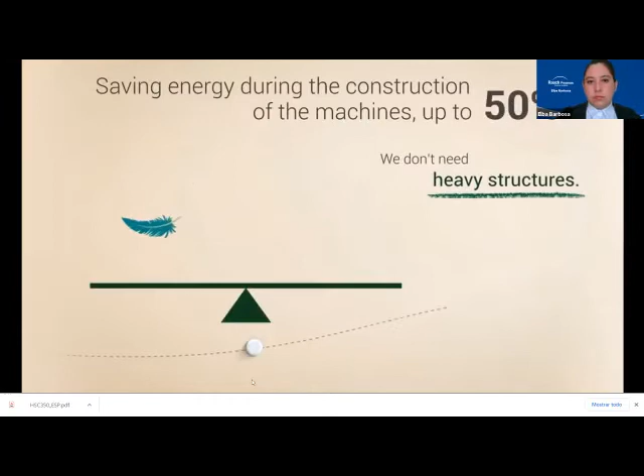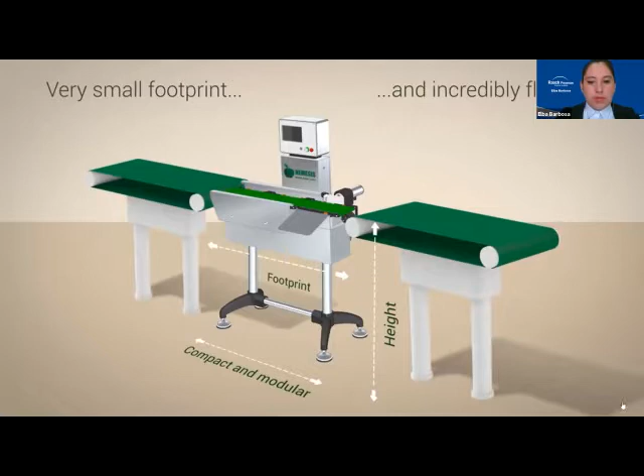Elba, creo que no escuchamos el sonido del video. ¿Qué pasó? No lo escuchamos. Si quieres, lo puedo poner yo. Ok. Déjame detener la presentación. Listo.

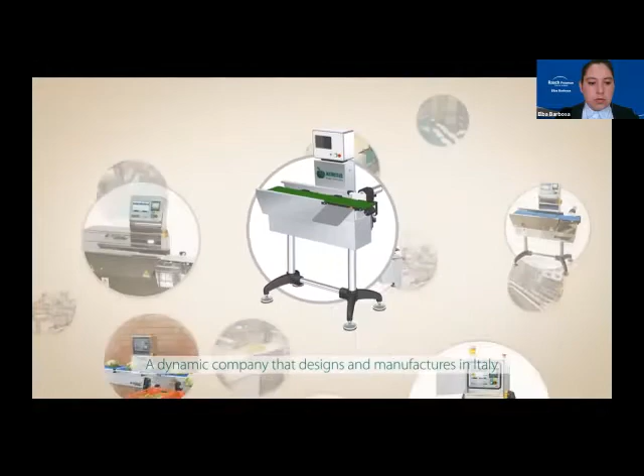Hi, Elba. Hi, Andrea. We already put the Nemesis presentation video, so they are already looking at it. So if you want, we let the video go on, and then you start. I'll just present yourself, and I'll leave you there. Okay. Okay, thank you. Por favor, Esther. Gracias.

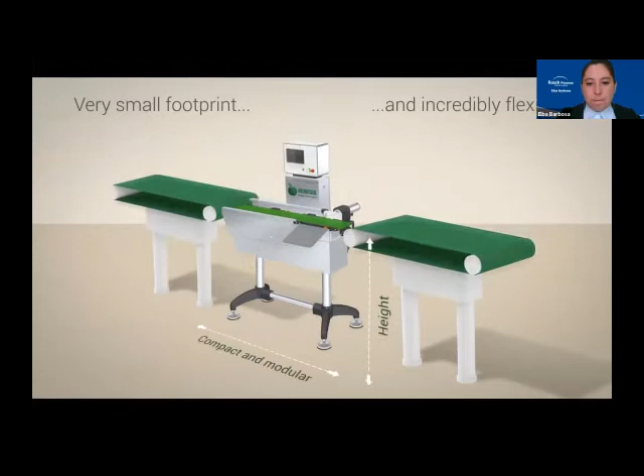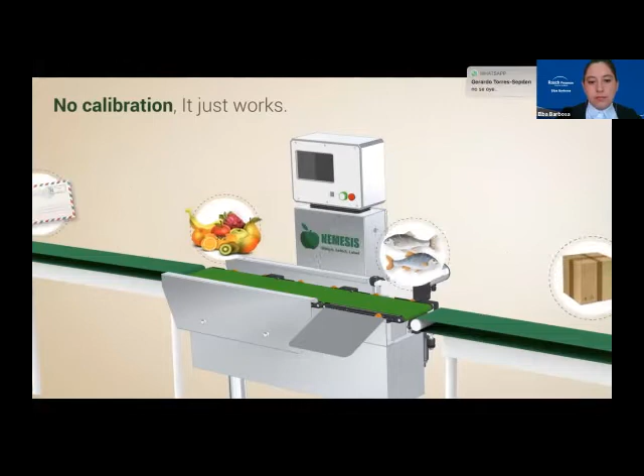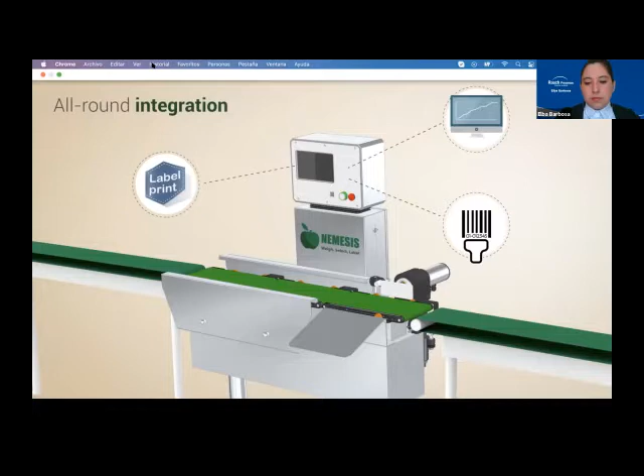Other inline devices is our priority to make the machine useful for the production process. The MID and OIML certification, complying with the law, ensure reliability and performance over time while protecting your relationships with customers. The operation and maintenance cost will be minimized. Friendly product. The intelligent design.

Elba, lo vamos a repetir porque creo que no se escuchaba en muchas partes. ¿Te parece bien? Y mejor, Esther, desde el inicio ya con el sonido, por favor.

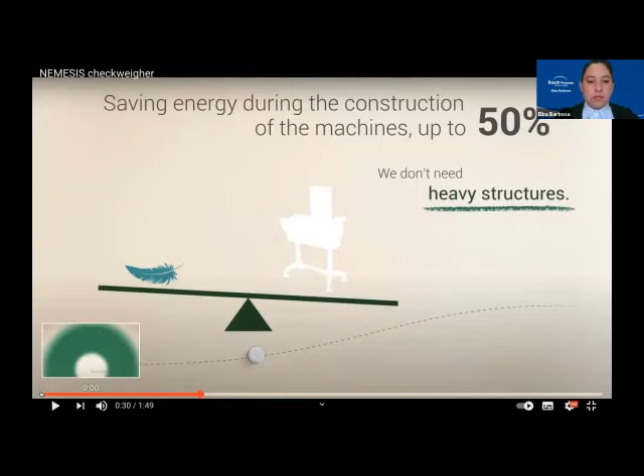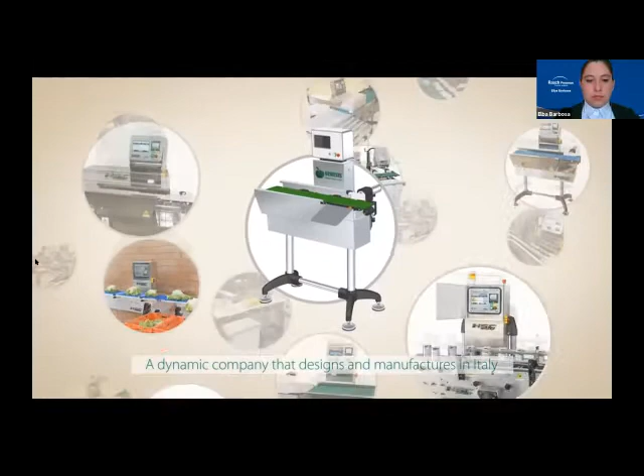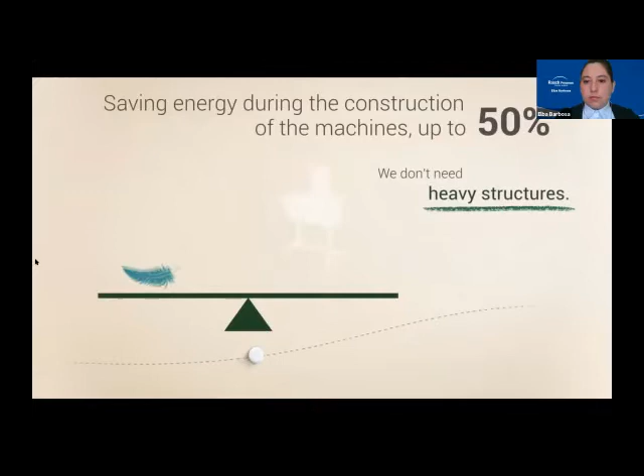Since 1976, Nemesis has designed high-quality control systems, paying attention to performance and efficiency of the processes. We are a dynamic company, and we offer a wide range of products entirely manufactured in Italy, sold worldwide through a wide network of distributors. Thanks to EasyWay technology, we offer an innovative, extremely easy-to-use, and environmentally friendly product. The intelligent design of the system allows an energy savings of up to 50% in the assembly processes and up to 80% on power consumption during operation using only low voltage.

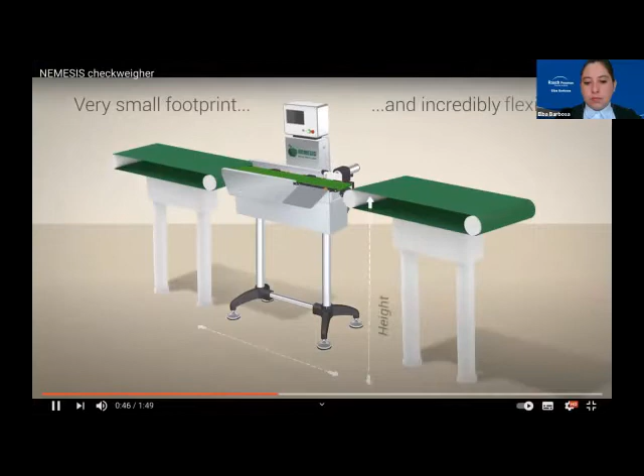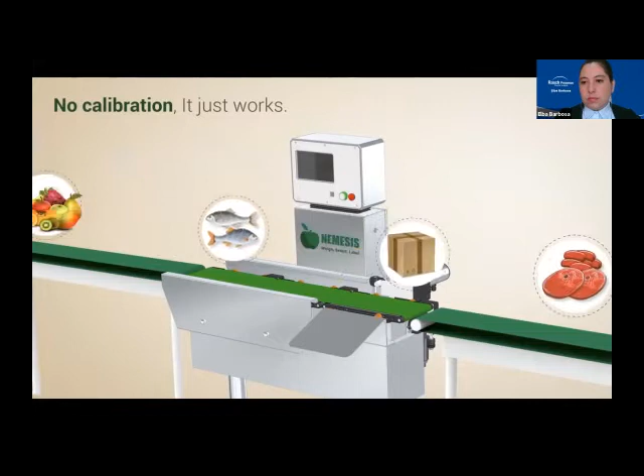We offer a very compact product. It can be integrated seamlessly into any production line thanks to hundreds of available configurations and custom solutions. The system requires no calibration with the product to be weighed, avoiding user-costly and repetitive manual operations.

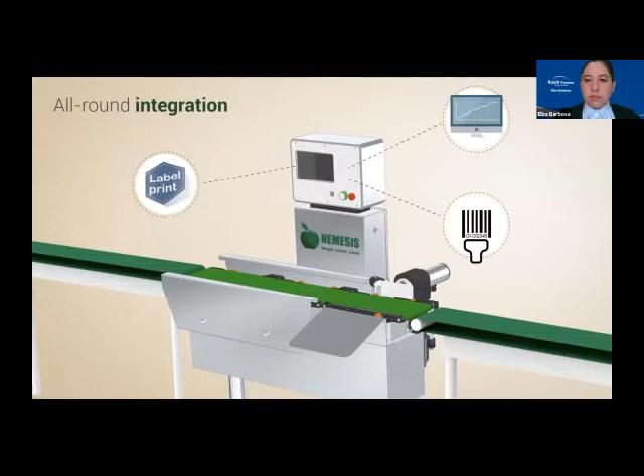The integration with other inline devices is our priority to make the machine useful for the production process. The MID and OIML certification, complying with the law, ensure reliability and performance over time while protecting your relationships with customers. The operation and maintenance cost will be minimized thanks to a quick availability of spare parts and to a reactive service network. Research and development in check weighers ensures the use of latest technology and continuous innovation. Nemesis, 40 years of passion for weighing.

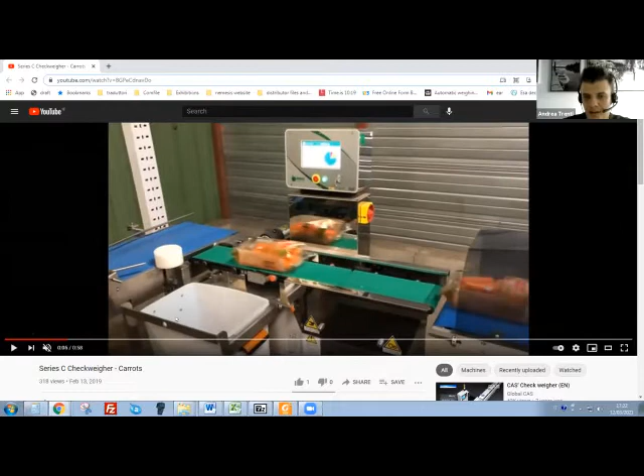First of all, I want to share with you these movies that show a very big advantage of Nemesis system compared to competitive checkweighers: the pitch required between one product and the consecutive one. As you can see, a standard checkweigher requires a gap between one product and the following one equal to the length of the weighing conveyor, because you can weigh only one product at a time.

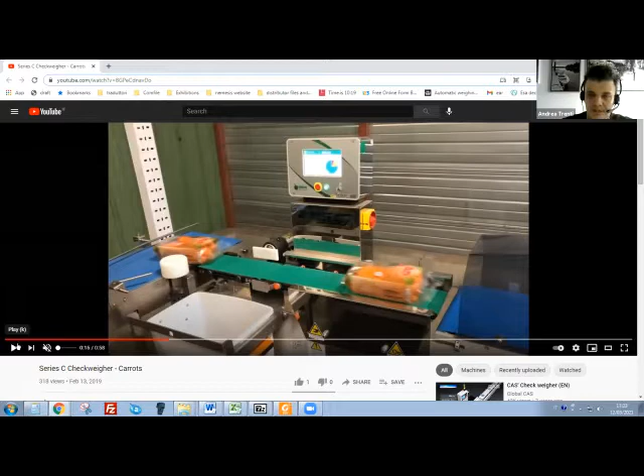The distance between products is the key factor to get a good result, and it's one of the most difficult things to achieve, because depending on the production line you can have random loading, a stream of product, or a molding machine. So reaching a very big gap is a hard issue.

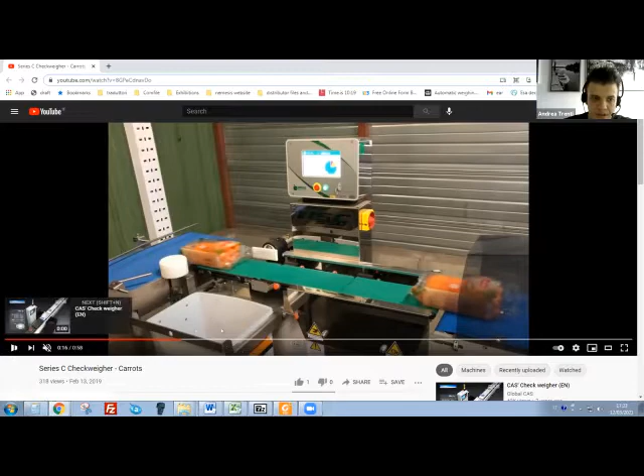Thanks to EasyWeight technology, instead of requiring a gap equal to the length of the conveyor, we can work in this way. I'll show you.

As you can see, the distance that we require is equal to the length of the weighing conveyor less the length of the product. This means we can reach a very high throughput with a very low speed of the conveyor, which means we can solve a lot of issues linked to the production line.

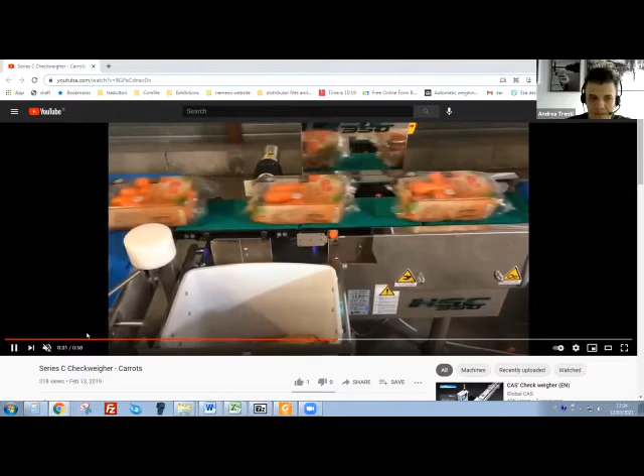This kind of behavior is one identifying skill of Nemesis, because we are very fast in checking the weight and making an auto zero.

This reduces a lot the cost of maintenance, because the conveyors run at lower speed, meaning lower power consumption, lower damage of the wearing parts, and also higher accuracy, because obviously as fast as you go, the harder it is to detect the proper weight. So this is one of the characteristics that distinguishes Nemesis versus competitors.

I would like to show you some of the series of machines that we have in our portfolio. We can start with the S-series checkweigher.

This checkweigher is specialized for pharmaceutical companies. The main characteristic is that they have a very small footprint, because generally Nemesis checkweigher has a total length of the machine for a standard checkweigher that is roughly half a meter less than competitors, and for a combo unit, checkweigher plus metal detector, about 1 meter less.

The S-series is for pharma companies, has a very small weighing conveyor and a very high accuracy, because generally in a checkweigher, the smaller the product, the higher the accuracy required. So the S-series can reach a production rate of 600 pieces per minute and can have a maximum scale range of 600 grams.

Here we have an example, a study case of a Nemesis S-series checkweigher for spray and bottles that I would like to share with you. It has the great advantage that you can install the checkweigher in parallel to the existing feeding line or in line, and has special devices that are a pair of feeding belts.

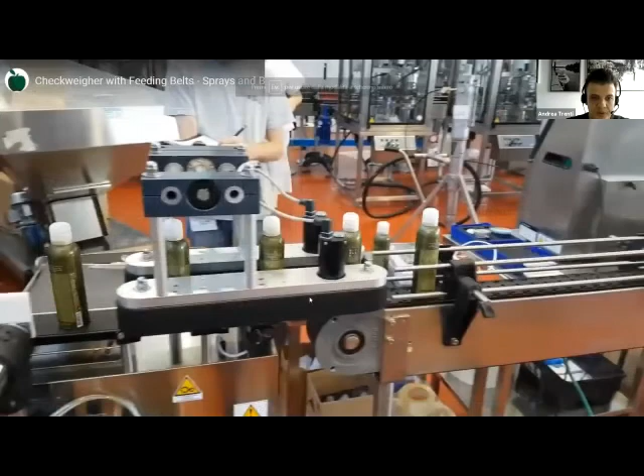This pair of feeding belts allows transporting the product, lifting it from the tabletop conveyor, and providing it with the same pitch to our checkweigher.

As you can see in slow motion, the product is very stable when loaded onto our conveyor, avoiding the problem that an in-feed conveyor with a very big diameter can cause, which is a lot of vibration and the risk of falling down.

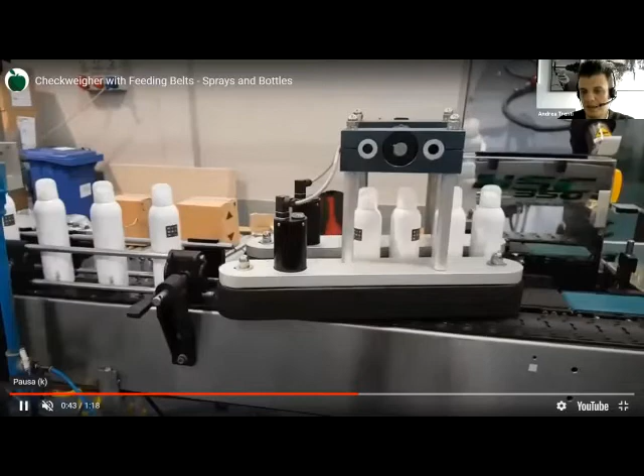Furthermore, the solution is studied: as you can see, using the existing long conveyor of the customer, thanks to the feeding belt we can bring the product from the main line, make the check in parallel in our checkweigher, and if it is correct it goes again into the main line. Otherwise, we can reject it.

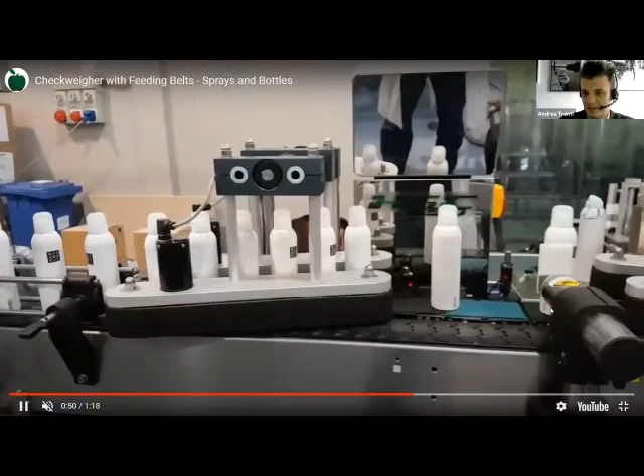So we can say this one, the S-series, is for small and high accuracy checkweighing.

Then we have the C-series checkweigher. That is the checkweigher we can call a standard solution, and we can customize it with a lot of different options. It is good for, we can say, all fields that can be weighed, and the maximum scale range is 8 kilograms.

Generally, Nemesis has a very wide portfolio of solutions, so we can say that everything that can be weighed on a line, we have a special solution for. As you can see, we have different types of rejectors linked to the type of product.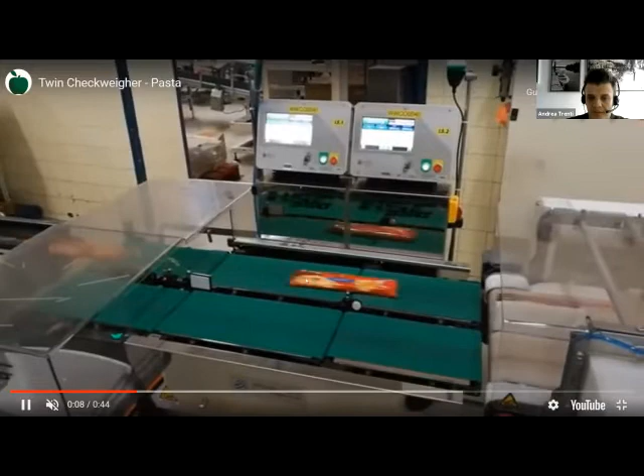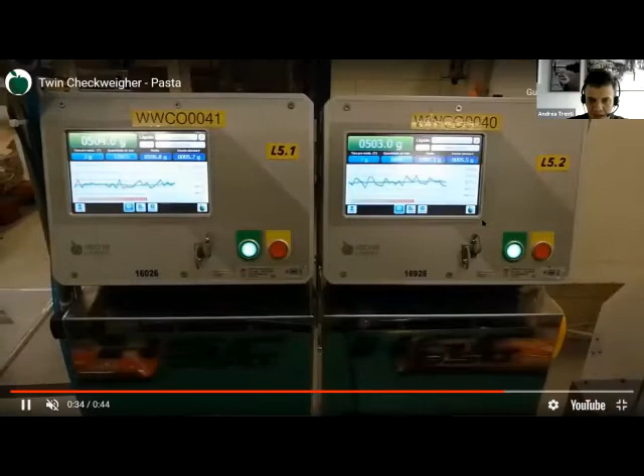install 2 parallel lines, up to 5 different parallel lines. As you can see, they work independently, so we can work with only one line or only with the other line. In the end, we have an air blast rejector that rejects underweight or overweight product, one side for one line and the opposite side for the other line. As you can see, they can work simultaneously, and we can change different parameters, one for each line.

Let's continue now with the high weight checkweigher. We can say it's the heavyweight checkweigher for heavy products, the H series. As you can see, the conveyors are much wider, and we can use it in logistics, in food, mainly in fields where you have carton boxes or big containers. The capacity of the checkweigher can reach 60 kilograms, and we also have a solution where we can change the slope for round product.

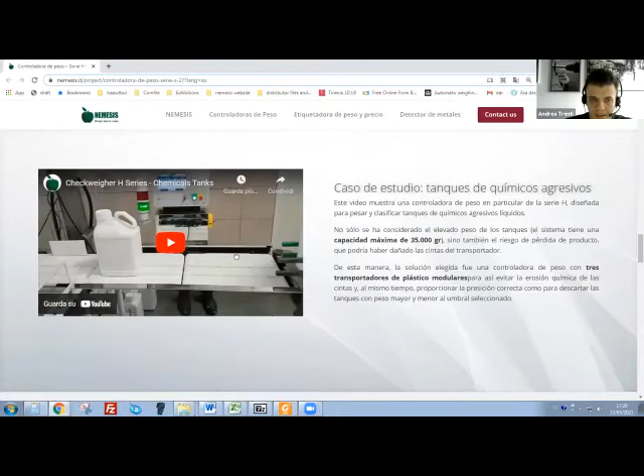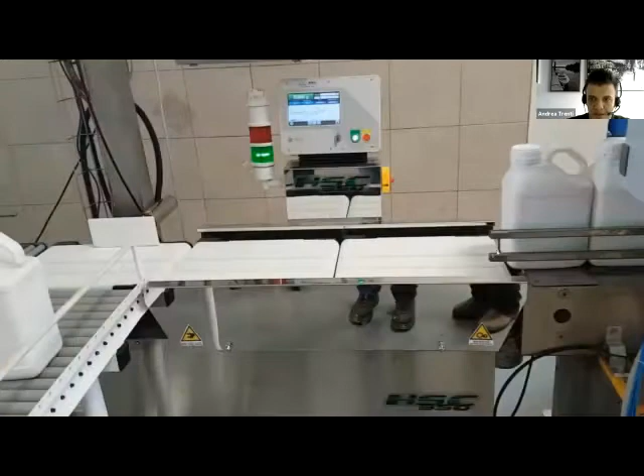Here we can see another study case, for example for big jars, where instead of using a standard tape, we use a modular plastic conveyor, so they cannot be damaged by the jars, and they have very low friction. If needed, we can install a free roller conveyor to collect the rejection. As you can see, we can separate either by difference in speed or with stop and start in the feed conveyor.

Let's continue with the solution for unpacked food. We can say mainly the G series checkweigher is an IP66 machine. As you can see, there is no frame, so it is very easy to sanitize, and we can use it with unpacked fish, cheese, meat. The main characteristic is that it can be washed down with high pressure, also using foam.

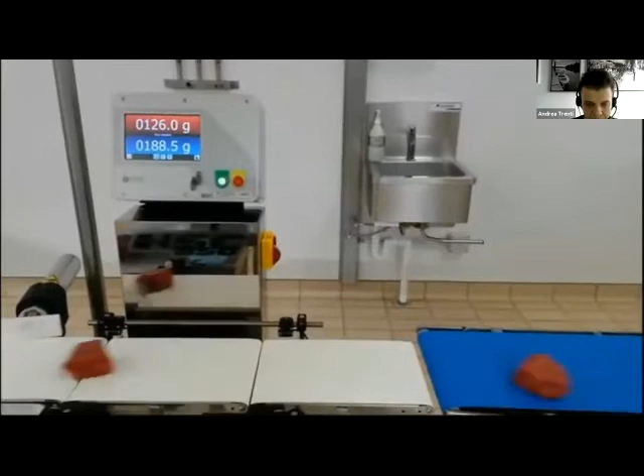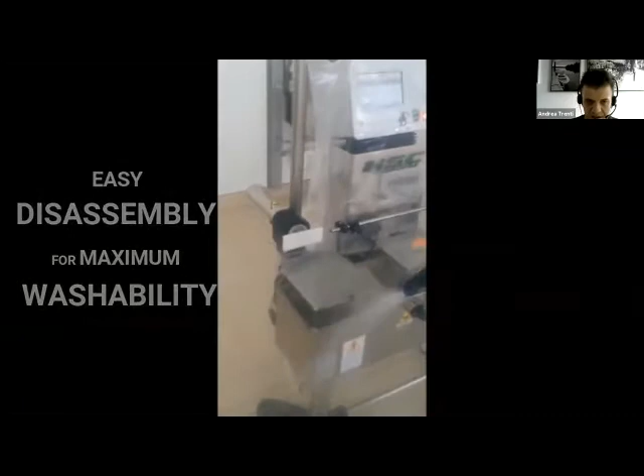Here you can see a study case of the G series for meat, for hamburger, or for fillet of meat, where we can also see the type of cleaning that you can apply. Obviously, this kind of product releases a lot of blood, so it requires a hard cleaning every day. As you can see, you can wash down by removing the tape. You see a lot of blood on the tapes.

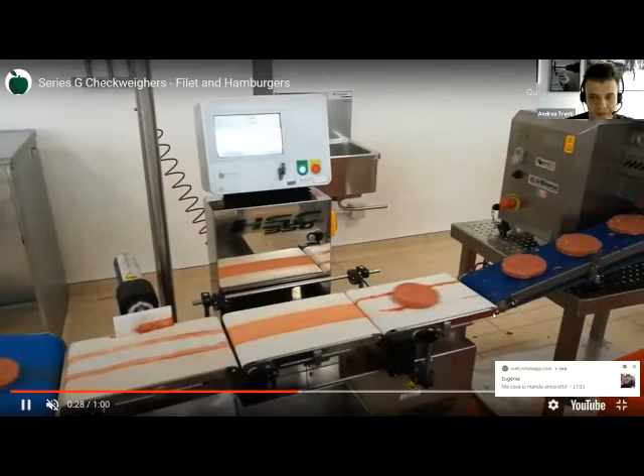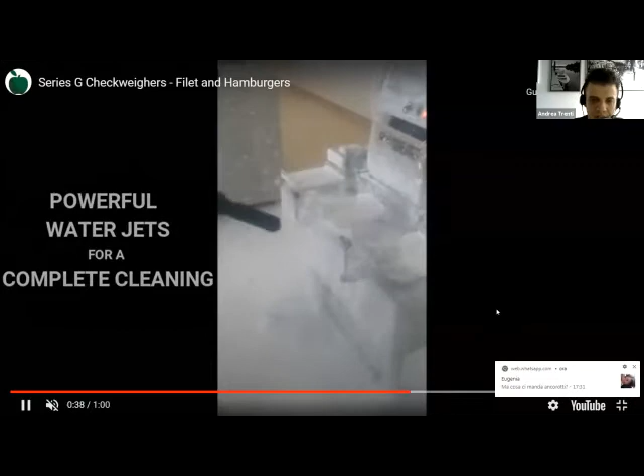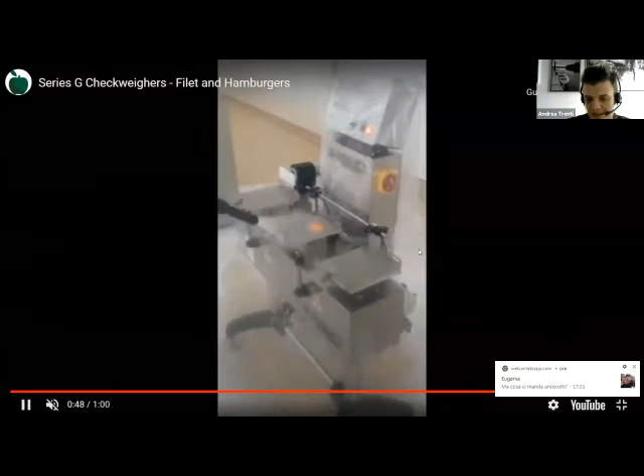And we can use foam. So this machine is really IP66. Everything, the load cell is stainless steel, the photo eyes are IP69K. So we can say that generally our systems are basically IP65, but for the solution for unpacked cheese, unpacked food, unpacked meat, we require a higher type of protection.

The next series of checkweigher is... just a moment, because I lost it. Here we are. I can go directly here. Sorry.

We have the R series checkweigher. This machine is for cans and jars, products that generally require a very high speed, and linked to the fact that glass and jars can damage the tapes, we use this kind of chain conveyor.

In this machine, we can add additional options like a feeding screw to separate the cans. We have a multi-progressive rejector to sort in different lines, underweight and overweight. And here we can see how it's working at high speed, checkweigher for cans.

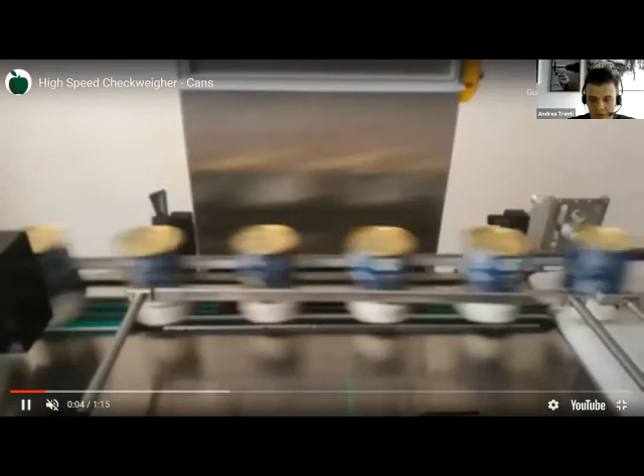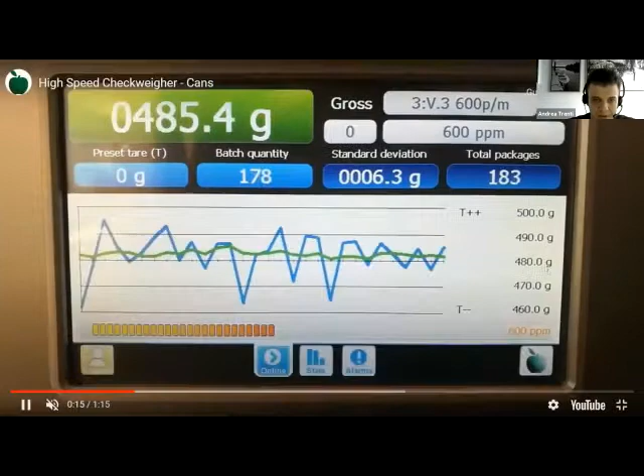Obviously, after that there is a slow motion, because it's too fast for our eyes to see. As you can see, the real production rate is 600 pieces per minute. It's not something only on the brochure, but it's the real production rate of this machine.

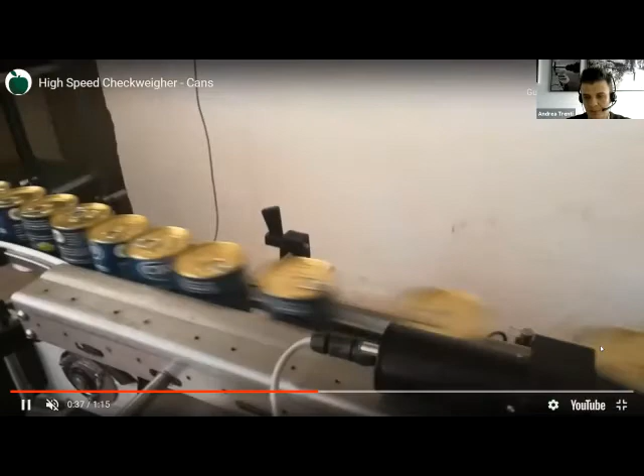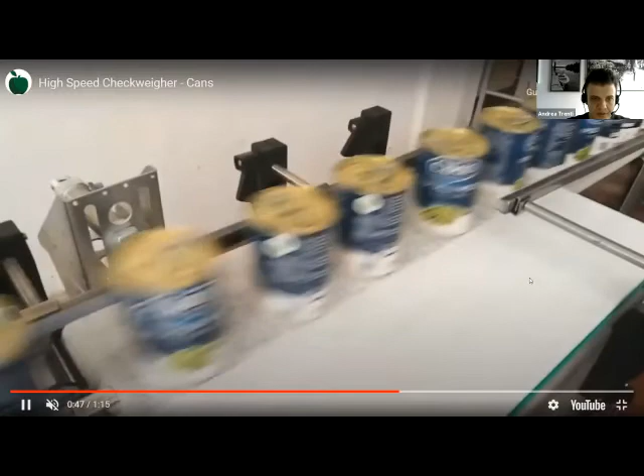We can see here we have a slow motion of the rejection. Here we can see that the feeding screw separates the queue of product to get the right pitch, and as you can see, the gap required is very low. Here we can see the rejection in slow motion, where the black ones are underweight and the others are the standard cans.

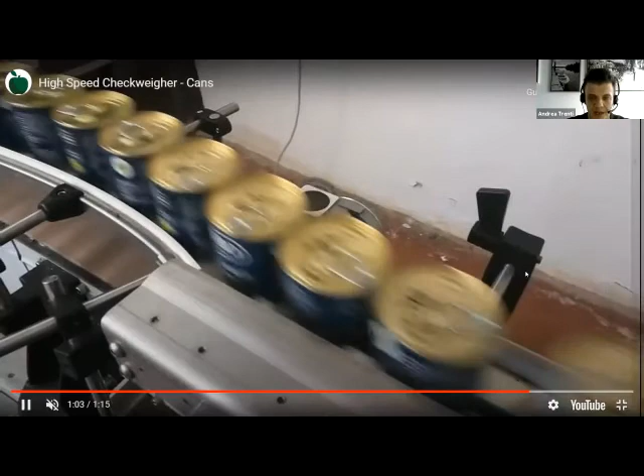This machine is IP69K, so you can wash it with high pressure and hot water.

The last main, okay, so we've seen all types of checkweigher that we can provide. Just a moment that I... Here I am, okay, sorry.

Then we can see that further than the checkweigher, we have also the combo unit where we can install the metal detector with the checkweigher. The great advantage is that we reduce a lot the space required, because generally a metal detector requires a long conveyor. We use directly the infeed conveyor of the checkweigher to install the metal detector and its rejection system, and then we have the checkweigher that checks underweight and overweight product.

Further than the combo unit, we can provide also the standalone metal detector that detects metal, mainly ferrous, non-ferrous, and stainless steel. We can reject the product with a side rejector, or we can just stop the machine, because generally the detection of metal is very rare in a production line. It can happen that a machine lost a bolt or a screw, or an operator lost some pieces of metal during production, but it's very rare. So sometimes if the production rate is not so high, we can also only stop the conveyor.

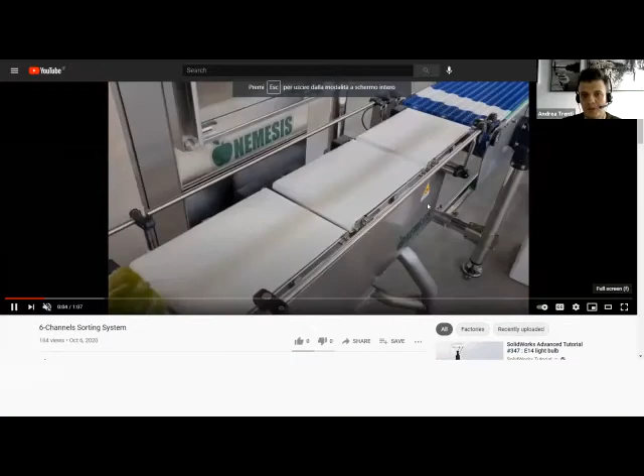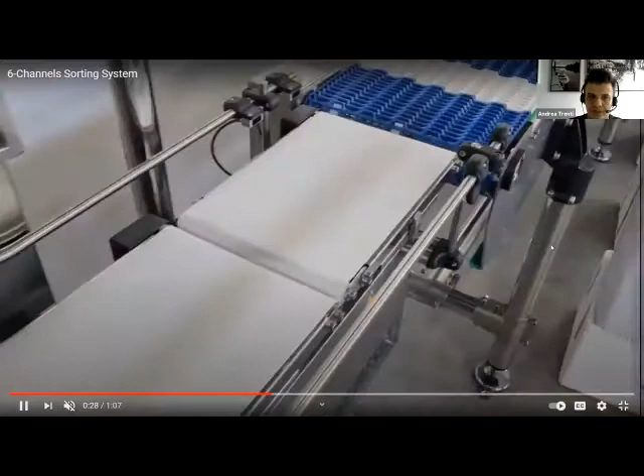Nemesis is very specialized for tailor-made solutions. We can see, for example, a grading system solution. In this case it's for peppers, where we sort the weight after the checkweigher into 6 different channels, depending on the weight - for example those lower than 200 grams, those between 200 and 400 grams, between 400 and 600 grams, and so on. Here is a side rejector, but we can use also an air blast rejector. We can use different types of rejectors depending on the size and how hard or delicate the product is. This is a solution with 6 channels, but we can manage up to 16 different channels.

The other main line that we can provide is the weight price labeling system. So we detect the weight, and with the weight detection, we can apply also the label with the price, depending on price per kilogram, barcode. So it's a combined machine, also in this case, in a very small footprint.

We can apply the label from different sides. Depending on the production and customer request, we can apply from the top - that is the most common solution, where it's done by overlaying the label over the product. Or we can make a machine with 4 conveyors, where between the last and the previous one, we install the labeler from the bottom, so the label is applied on the bottom. Otherwise, we can make it with an arm applicator on the front side, or air blasting from the side.

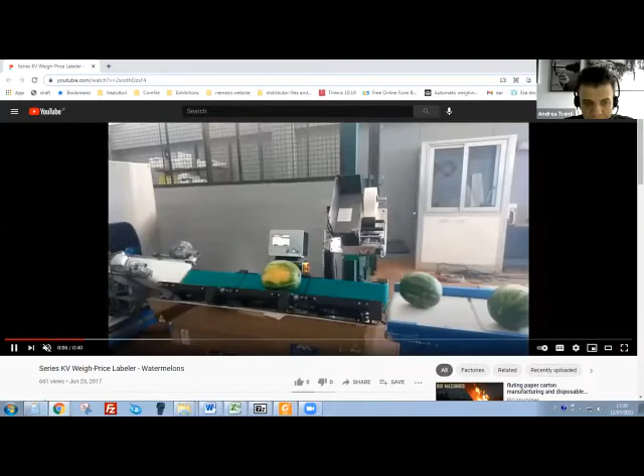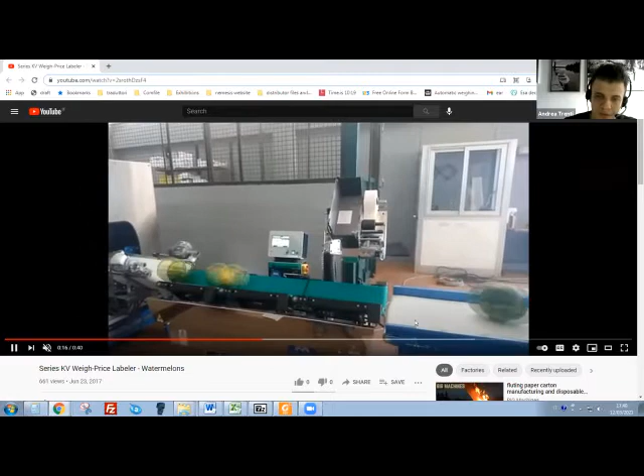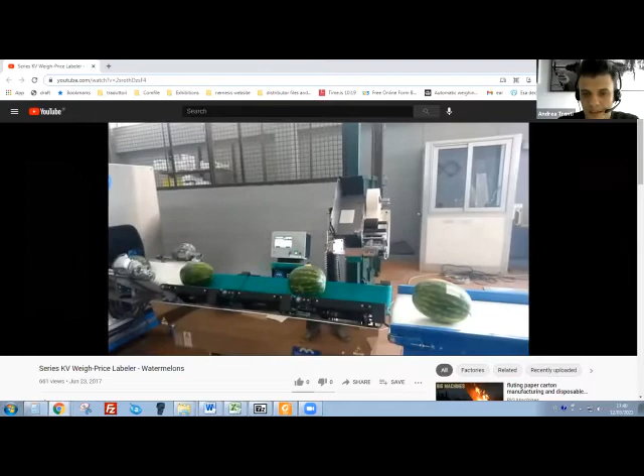I want to share with you just some movies. First of all, the watermelon weight price labeling system, for example - that is a special solution for round and cylindrical products, where you can see that watermelons, notwithstanding they are waving and moving, we can apply the label and have no problem with the weight, because easy weight technology allows very good, we can say, immunity to vibration. We can compensate it because we have very fast detection of the weight and very good filtering.

Now I want to show you some details of some devices we can install in our systems, just to give you an idea of how many different solutions we can provide, tailor-made to the customer's solution. What I usually say is that we don't sell systems, we sell solutions.

The checkweigher, first of all, one of the main things it can do is save money, because usually you need to provide a minimum weight to the customer, to the end users. The only way, usually, if you don't check the weight of each product... one moment, let me stop sharing so you can see me. Okay, usually to guarantee 400 grams or 500 grams of product, the only way is to overfill. But overfilling is a cost. So if you make a detection of the weight on 100% of production, you can be much more accurate on the filling machine, and the final result is that you save a lot on overweight products. You can also guarantee a good relationship with the end users, because you can prove that you are checking 100% of your production.

I'll show you some other details of options that we can provide. For example, if you are a producer of oranges, products that are in a net are very difficult to reject with a standard side rejector, because it can entangle. So we have this solution that is a flap fold-down rejector, if it's starting...

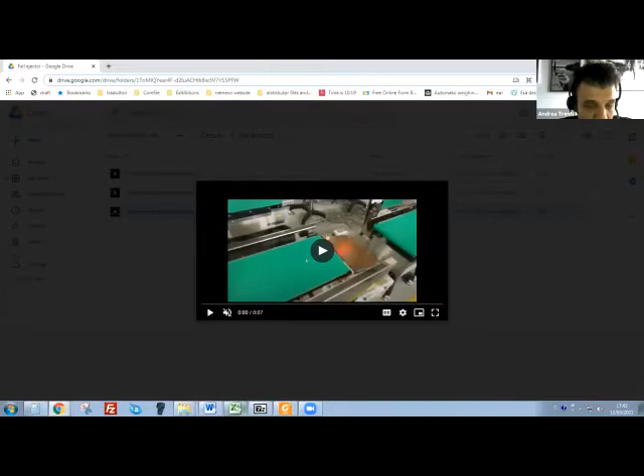Sorry, but I have some problem.

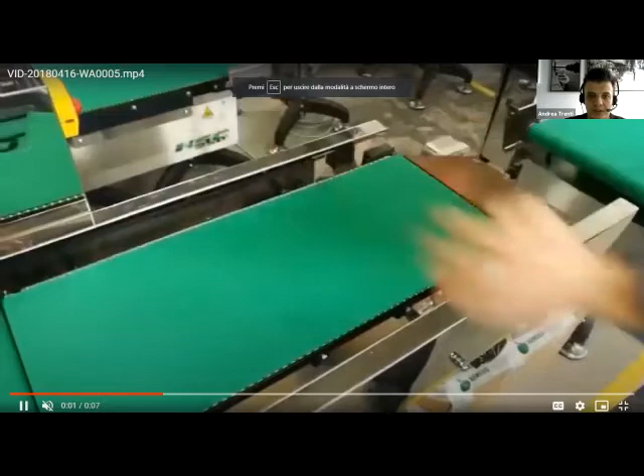As you can see, when the net arrives, if it is underweight or overweight, it can fall down, so you avoid any risk of entanglement.

If you have, for example, a product that you want to divert into a second line, we can use a flipper rejector. That is, instead of a side rejector, it is like a side guide that guides your product outside.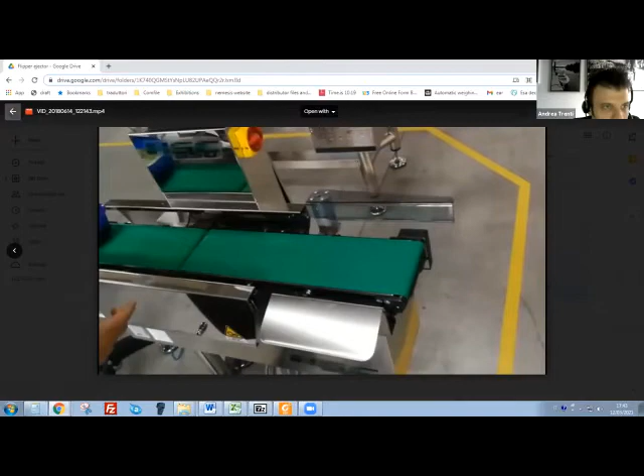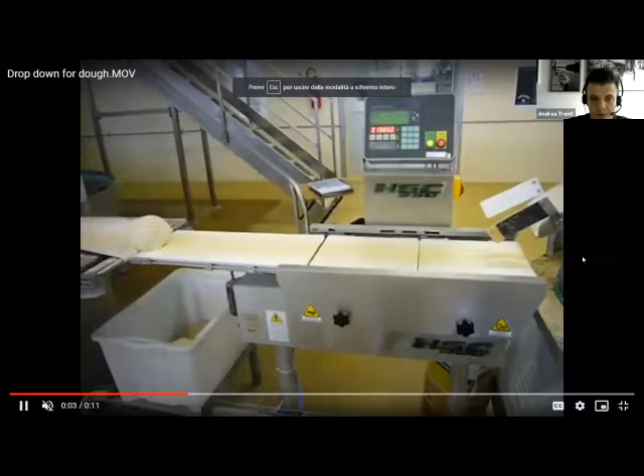If you have dough pasta, which is a very sticky product, you can use the drop-down rejector. As you can see, this one is dough pasta. Before it is processed, we need to check the weight. If it is underweight, it falls down.

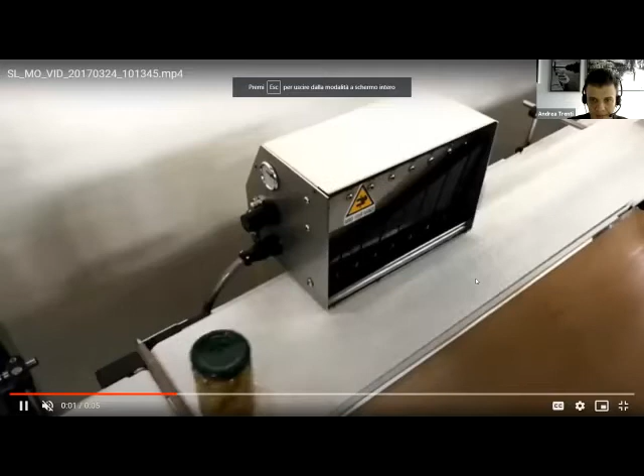We have the progressive rejector that is used for cylindrical product, for example, or unstable product, that allows sorting. Using this kind of finger arm applicator that diverts glasses or jars and so on, they go down one by one, so you can go very fast, and step by step they lift up when the product is diverted.

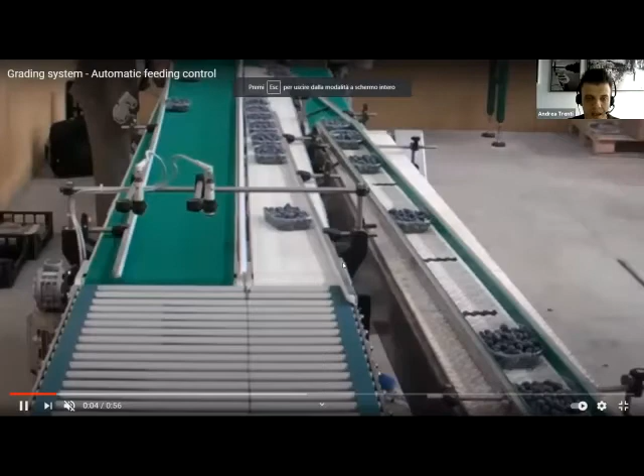This one, for example, if you have soft fruit, a good example that is usually a very high expensive product, and there is a manual operation of filling, we can check it.

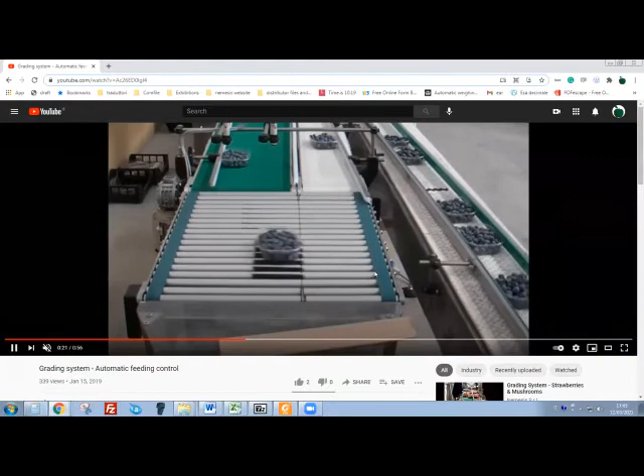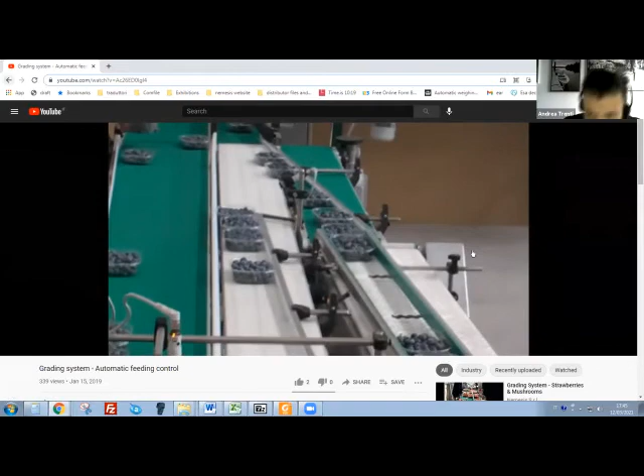¿Cómo? Hello? No, no, continue, Andrea. Sí, Andrea. Oh sí, sorry. Okay, sorry, okay, so here you can see, just a moment, I took the wrong movie. This one is much more indicative.

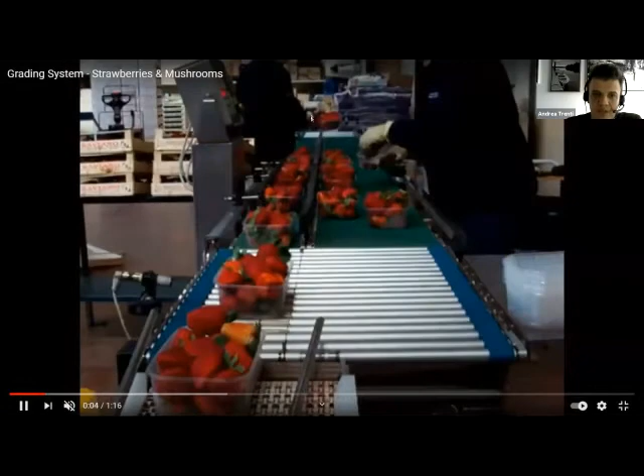As you can see, there is the standard checkweigher that detects the weight of the single tray. If the product is correct, it will go straight on in the main line. If it is underweight, it will be sorted into this line so the operator can fill the tray with the missing strawberry. If it is overweight, it will go into this channel so the operator can remove a strawberry. After they make the check, the sorting system puts the tray back into the main line, so you can check again if the weight after the correction is correct. So the product, until it reaches the right weight, will stay on the line.

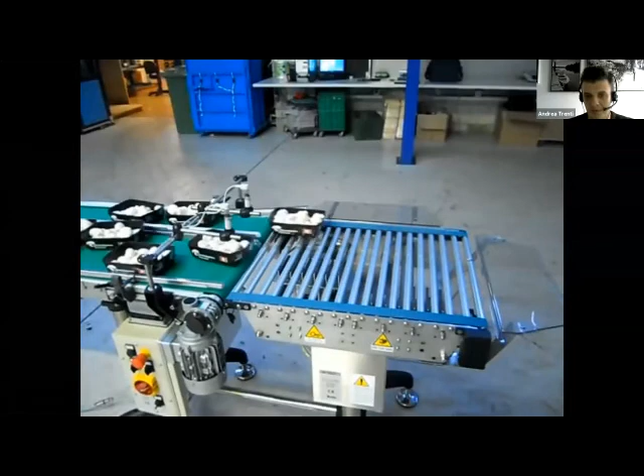The same applies for mushrooms, for all types of trays, where there is a manual correction possibility before flow packing, because obviously when you make a flow pack, there is a cost after rejection. In this way, you make the packaging only when the product has the right weight.

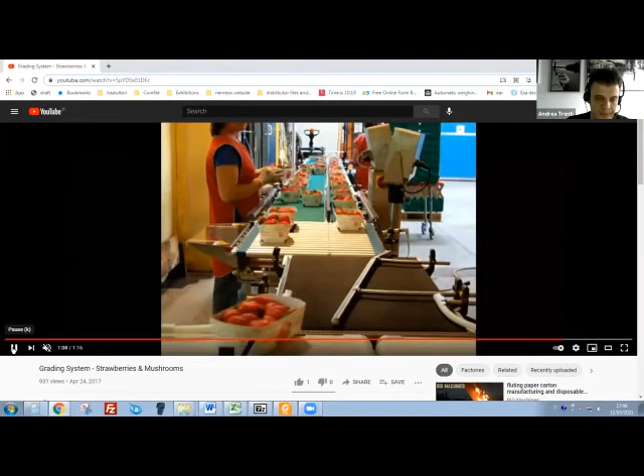Okay, I want to go back to the main presentation, just so I can stop sharing, to discuss with you. Sorry, where is... I lost the connection, Elba? I'm still connected, I don't see anyone. Yes, Andrea, you're still connected, okay, now I see it. Okay, sorry, okay.

Can I just say the last thing that is very important that I want to take care to tell you about EasyWeigh technology? One very big important detail is that our system doesn't require any calibration or any learning.

So when you want to start checking a new product, generally with competitors' machines you need to pass the same product several times, then you need to check that the product is always in the same position. When you make this learning procedure, you need to stop the machine and check if, in static weight or dynamic weight, you get the same result.

Our system doesn't require any learning, because when you start a new product, you just select the maximum and minimum tolerance and you can start the machine without any calibration or learning procedure. So we can say that we avoid human error and cost, meaning loss of time, when you want to create a new product. So we can say that the machine becomes plug and play.